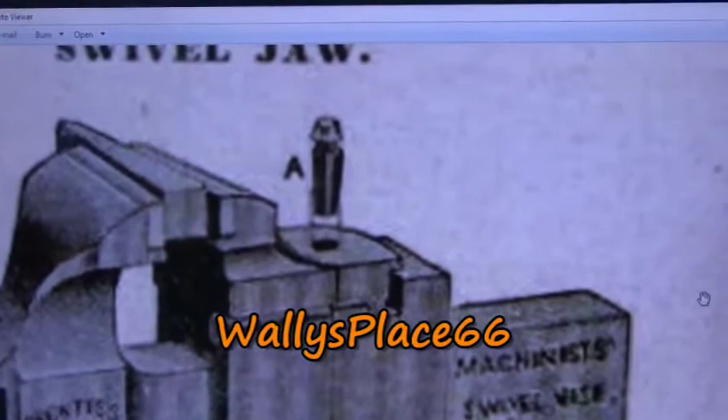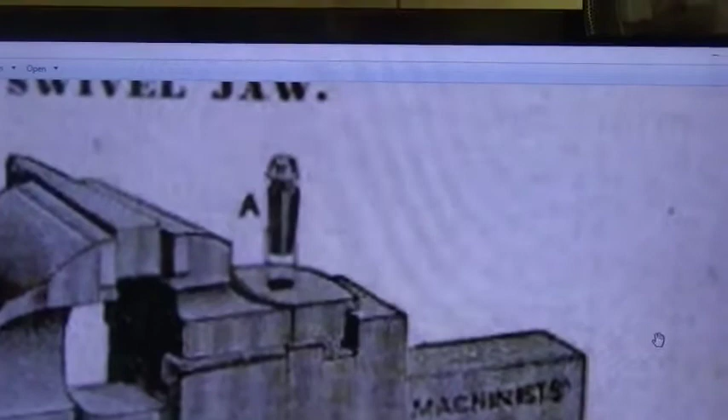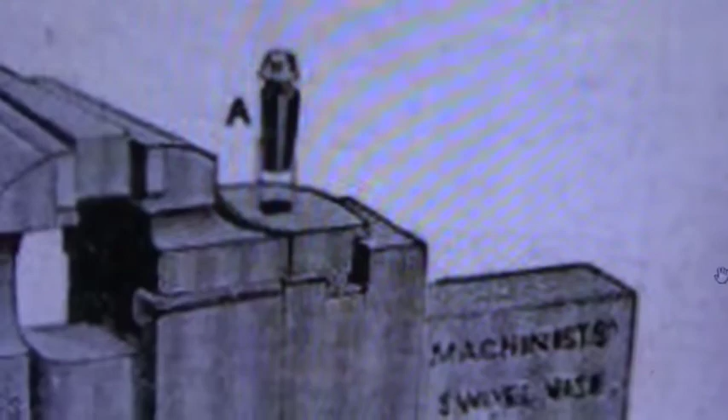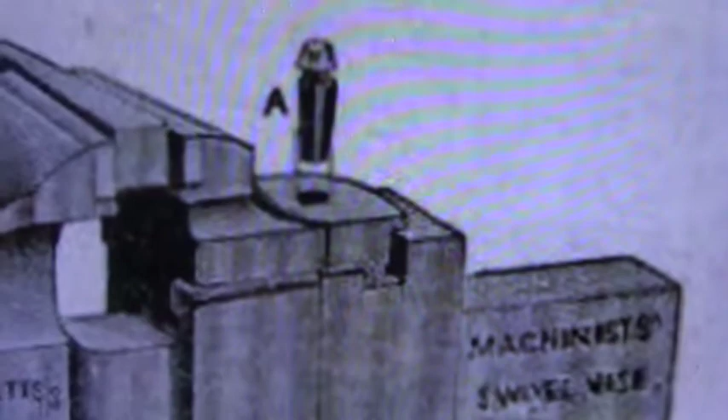I've been talking with Wally, and you may have seen in one of his videos his Illinois haul, one of the items was a huge bench vise. It turns out it's a Prentice. He was asking me about it, and he described a hole in the top of the vise, right where the anvil would be on a regular vise. I said, Wally, that sounds like a swivel vise. Sure enough, he found it's a Prentice 5-inch swivel jaw vise. Really nice, so he's been cleaning it up.

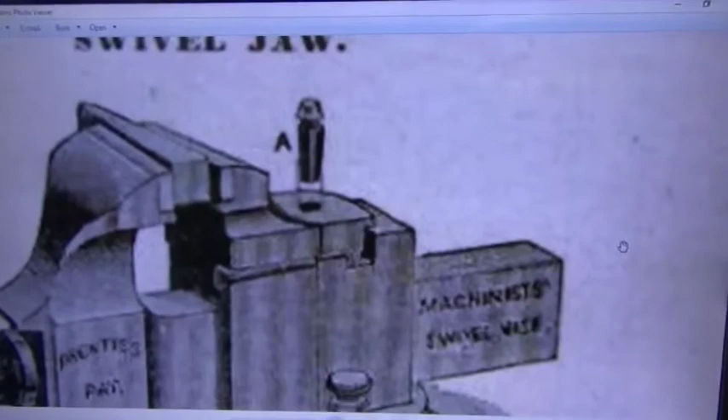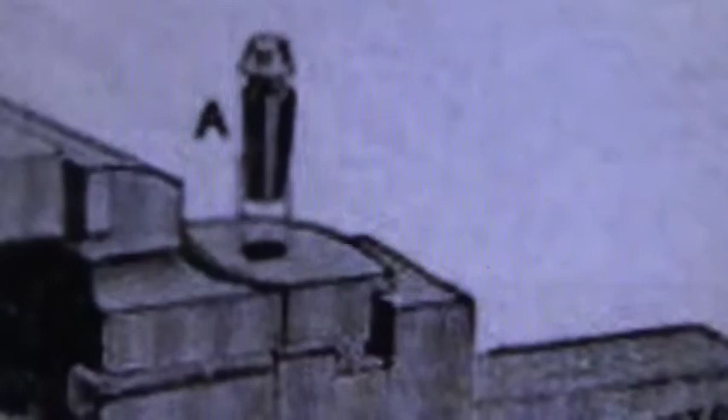Well, it was missing the pin that you see in this picture I downloaded from the internet. It's obviously a tapered pin if you look at that. So what I had him do, after he got it cleaned up, was mic the very top of that hole, and then that hole goes all the way down through the main body of the vise. It's a through hole that comes out just above where that column slides through the body of the vise.

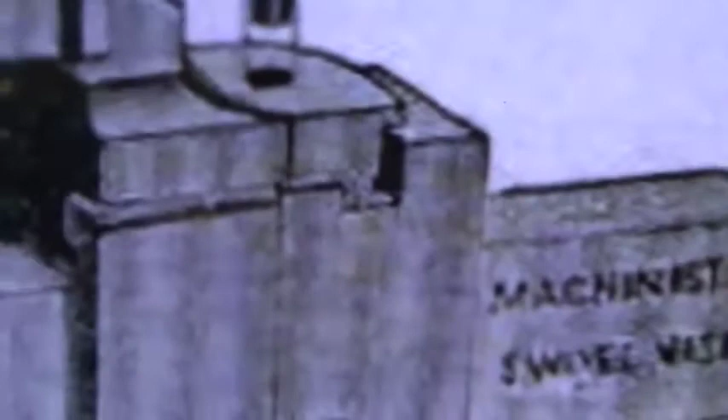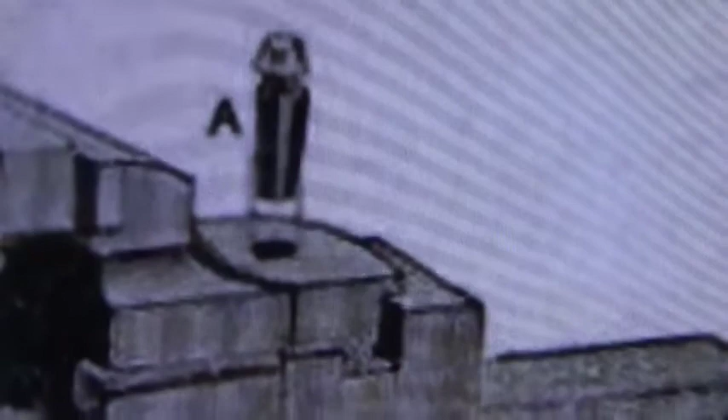So I had him measure the top and then measure the bottom from underneath, so I have my taper and an overall length. I want to make sure this pin doesn't go down and rub on that column.

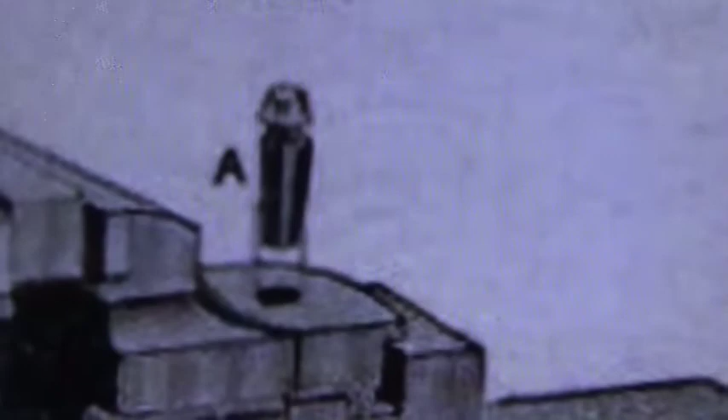So the idea behind the pin is just to lock the vise in the straight position. It's not a pivot pin or anything like that, but it's just a means to lock it straight when you're not swiveling it. So I'm going to make one, and I'm going to get busy and lay one out.

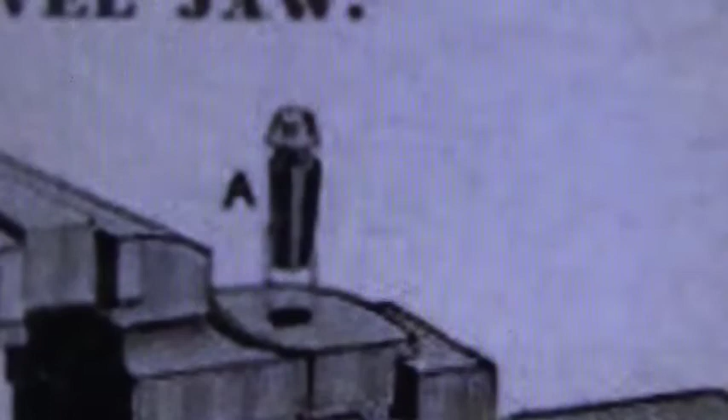It shouldn't be a very hard turning project, and I'm just going to try to copy the shape that you see in that photograph as closely as I can.

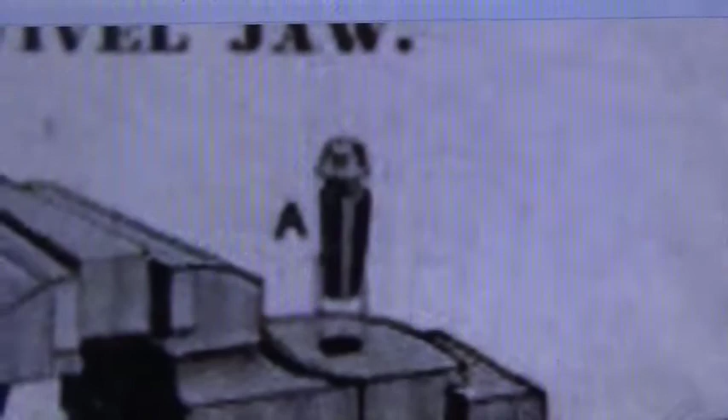The most important part is the taper itself, but obviously that's just a head form, so you can lightly tap that pin into place after you get the vise straightened out. There's a little bit of a recess under there, probably to get some sort of wedge or something to extract the pin when you wanted to swivel the vise. So I'm going to get started on that, and we'll see you over at the lathe.

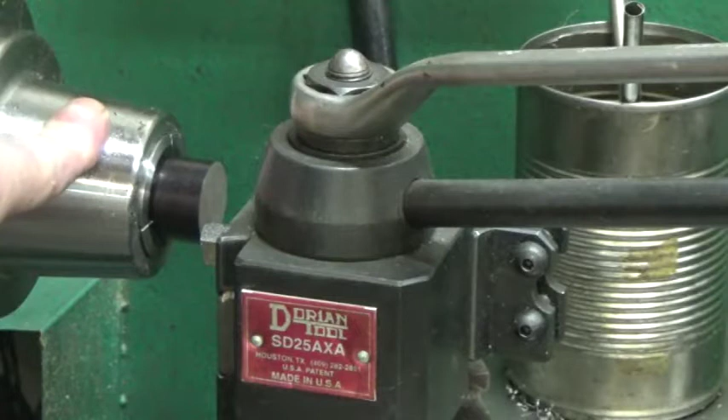I'm going to start this by making it out of 12L14, because that happens to be the only stock I have that's big enough, and I think that'll be fine. The pin is simply meant to be put in position and then tapped lightly home. I don't think it has to be hardened or anything like that, so the 12L14 should work fine.

I've just cut a piece off on the bandsaw, so I'm going to face it. I've got it in a 1-inch collet, simply because our collet chuck was already mounted on the lathe. So we're going to get it faced, and I'm going to try to stay out of your way so you can see what I'm doing.

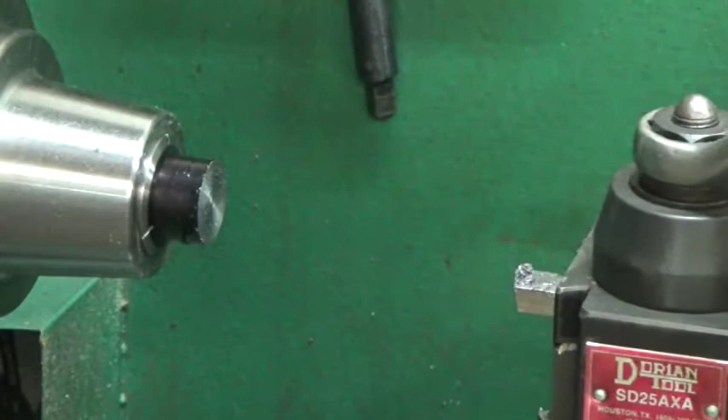Alright, the little bandsaw makes a pretty square cut. So now I'm going to loosen this collet and pull out enough stock. I've got this Sharpie mark on all of it so I can do some layout. Alright, I hope you guys can see this.

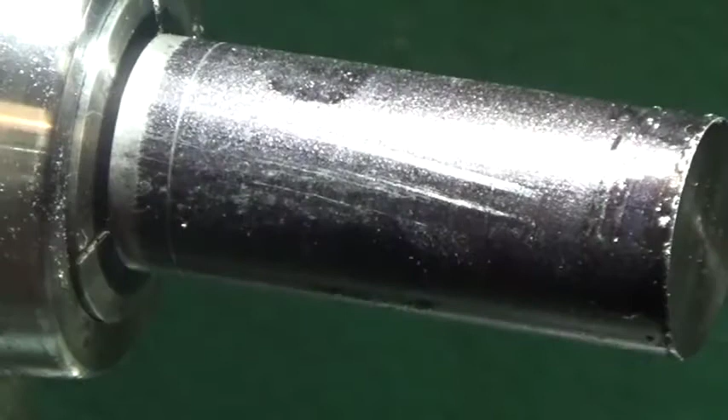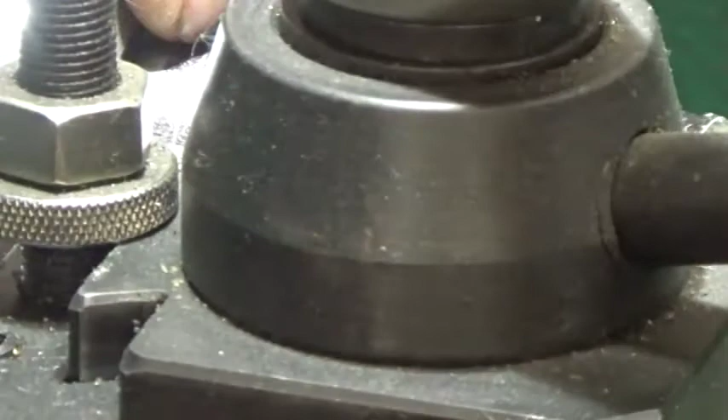I have a little scribe line right here, and I've brought my tool up and set my carriage stop to stop me right there. So the major diameter of the taper is 800 thousandths, and we're going to be turning this 1-inch bar down to that diameter for this length before we actually go to turn the taper.

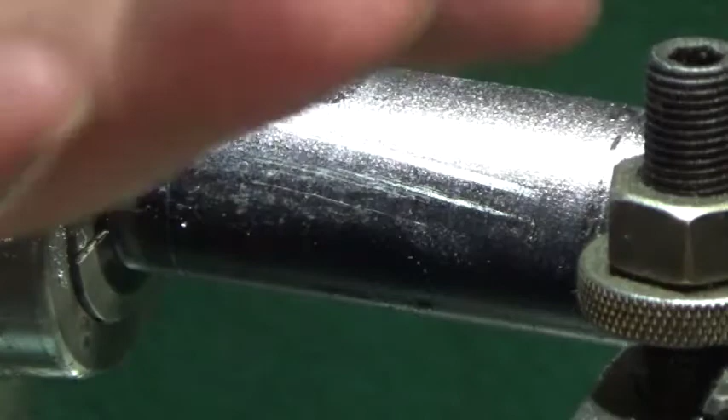And then I have some extra bar in here that I'm going to be bringing out. They'll be forming a little bit of a striking head, and then a means to get a wedge under there and pop this pin out should you want to swivel the vise. I've got that set for a pretty fast speed just to get the metal hogged off.

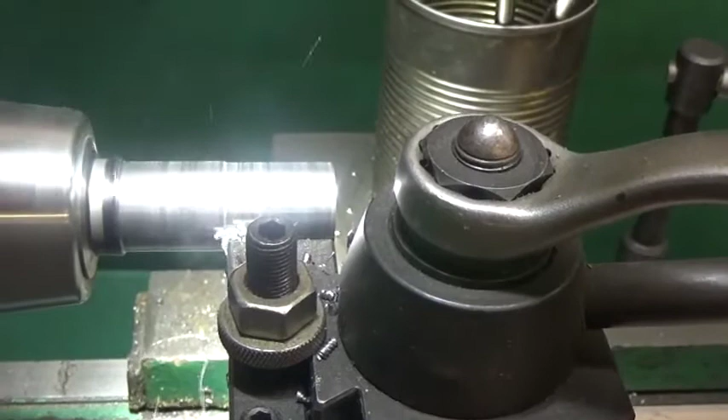Alright, I've set these calipers for 825, so we'll go down until these just slip over, and then we'll approach 800 slowly. Then when we start turning our taper, the taper will terminate here at 800 and it'll gradually reduce in size down here.

And I wrote down the measurement, it's over there on the workbench. Of course, we'll be feeding that by hand because we're going to be doing that with the compound rest. So I'll come back when I am set up to do that taper, because it's just a bunch of turning right now.

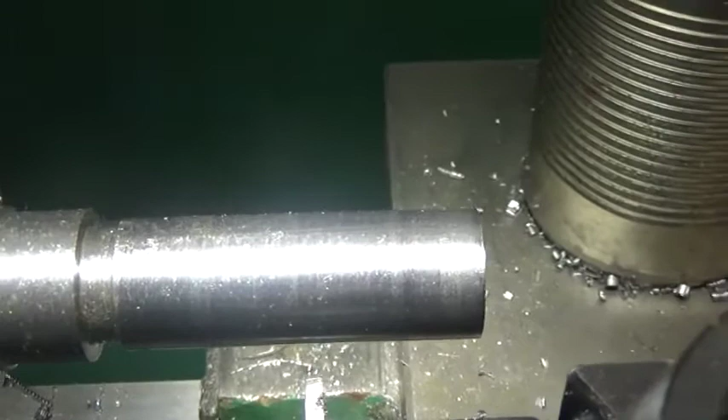And so I stopped that diameter at about 804 or so. Since we're dealing with a taper fit, I think it's going to be fine as long as I get the geometry right. At the end of the section that's going to taper, I provided an undercut because they have one on the little picture. Then I'm going to form that other piece into a little bit of a head that can be gently struck, driving the pin home into its seat.

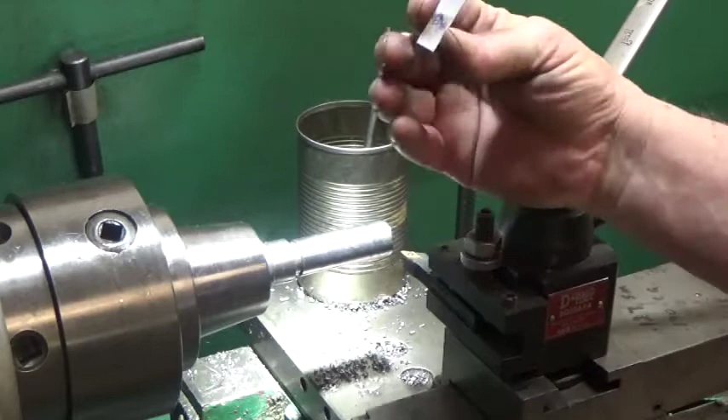Okay, we're not dealing with much of a taper at all. That is essentially half of the pin we need to make. So I just use that as a gauge and work back and forth, and I've got it pretty darn close.

So we're going to start turning our taper here, and I'm just going to take it about 20 thousandths at a time, and stop down here when we are at 660, and hopefully when that is at 660 we'll have come out the other end of the taper at this point. So here we go.

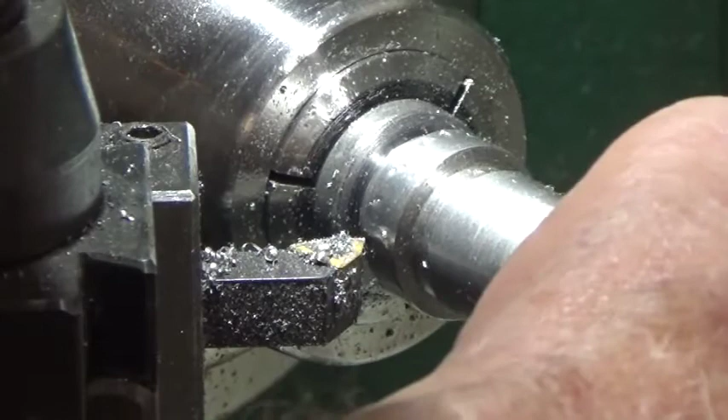Okay, for most of this I have had my big floor fan on because it's just hot in here, but I've turned it off. I've got the taper finished and it measures 660. I put a little file chamfer on there, but right at that end, before I chamfered, it measured 660. This is exactly 800, so we're good on the taper.

And now I'm just making a little bit of a head for the pin, kind of freehand, no formula or anything like that, but I'm just turning about a 30-degree taper on that. And then we'll finish parting it off.

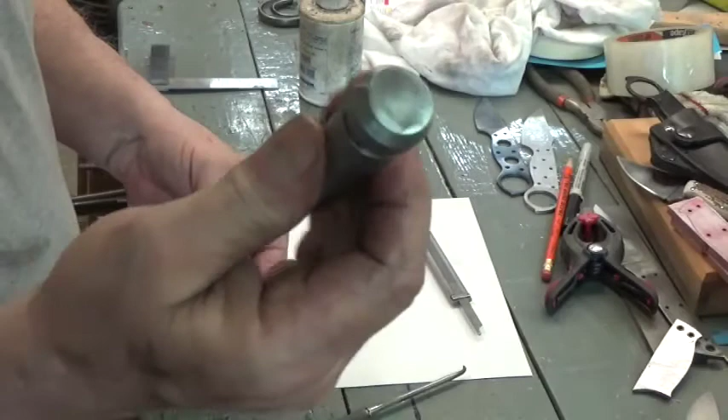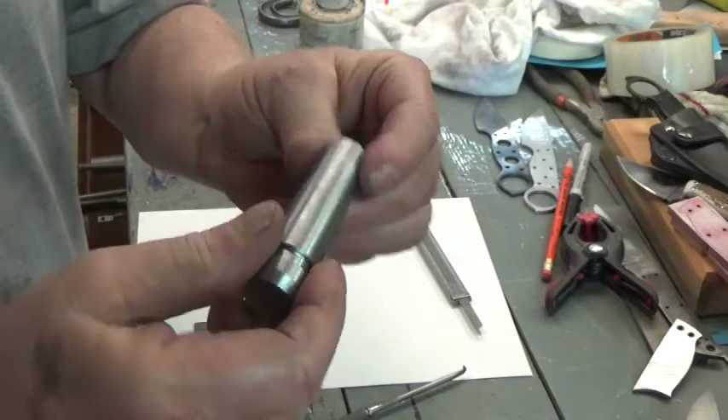Alright, well there you go. I think that's going to work for you, Ron. We'll get this into the mail for you tomorrow, so you can get that vise up and running. So there we go, fun little project. Haven't turned a little compound rest taper in quite a long time, but this one turned out pretty good, so I think that'll fit the bill.

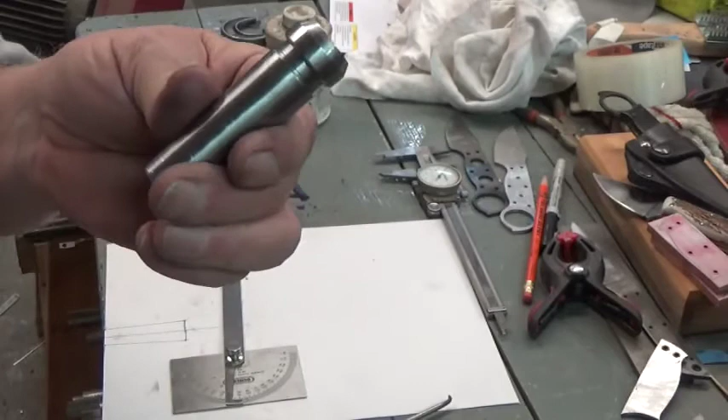Alright, this is a little addendum to the video. So I contacted Ron, let him know this is ready to ship, and he made one little request. So yeah, sure, why not? There you go, buddy, it's on the way.